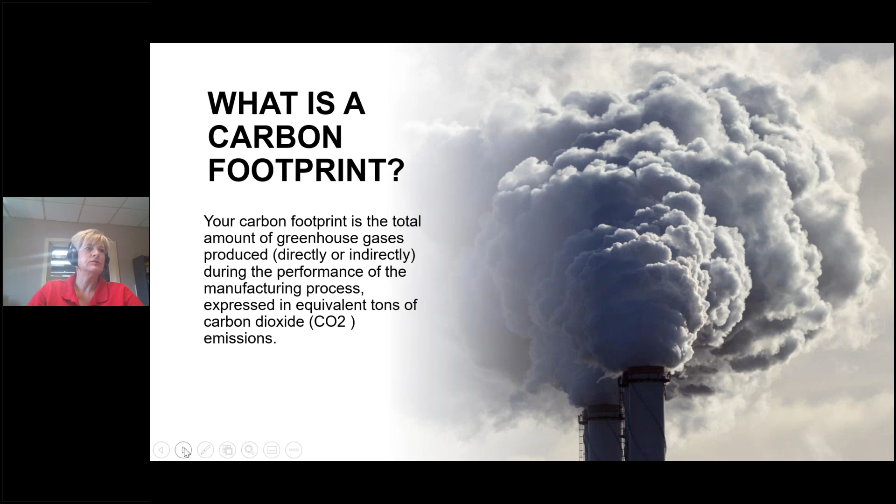The thing that I find people don't get—it's not very well handled in the media, and it's a very confusing concept—but in reality it's fairly straightforward: scope 1, scope 2, and scope 3. Scope 1 is yourself—all the CO2 you generate in your company, directly through your equipment and what you do for a living. Scope 2 is your fuel, all your indirect purchases—basically the electricity and natural gas that you purchase. And scope 3 is basically everything else.

So all your vendors, all the end of life for your products, flying on planes, driving to work—all those things are your scope 3. Mostly what we're going to talk about today is scope 1 and a little bit of scope 2, because scope 3 is so far beyond what I can even mentally get my arms around. We just got to start with scope 1 and scope 2—start at the beginning. So a little bit of background.

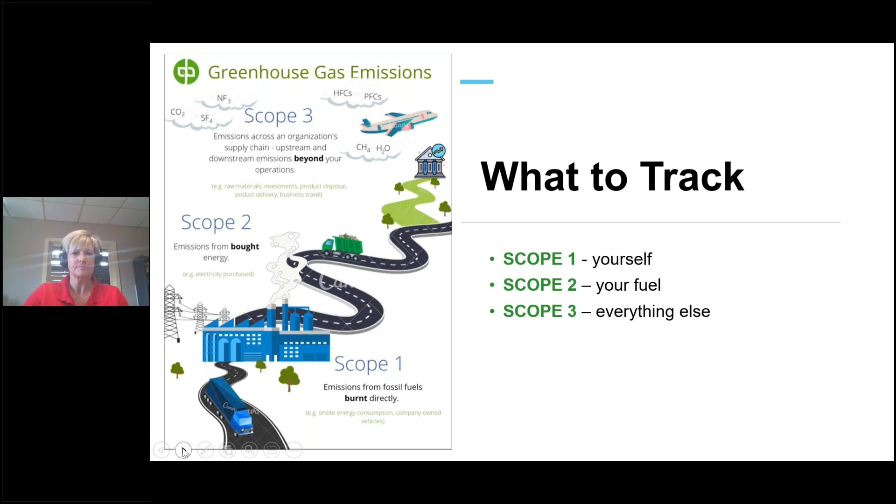There's a lot of little facts that I thought were really interesting, from a lot of different sources, but this is pulled all from either government sites or other large carbon reduction sites. I tried, if it was something specific to the industry or something that was really shocking, to cite where it came from, but most everything else came from published sources.

So if we look at the entire market of electricity that is generated from fossil fuels right now, it's a little over 60%, 20% renewables, and 16% nuclear. That's something we've heard a lot. And one of the things they talk about is, how do we electrify when you're still getting it from coal? What are we really accomplishing? I can't solve that problem today, but I can give you some strategies.

If we look at the greenhouse gas from electricity—being able to make electricity—it's really some interesting numbers, that right now there's more carbon being produced through electricity generation than there is actually in fossil fuel burning. But that's kind of the whole point of why they're trying to convert to renewables. And another great statistic: 77 quadrillion BTUs are consumed in the US.

So I had to Google it because I didn't know it off the top of my head—a quadrillion is a million billion. So 77 million billion BTUs is what we consume in the US. That is a lot of power.

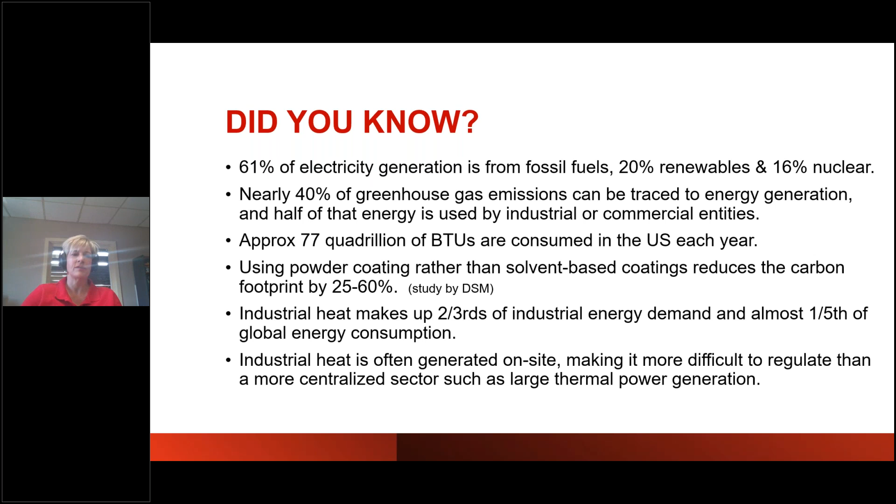You can't really transport heat energy. You have to make it. You have to have a burner. You have to have something that generates the BTUs. So just in case anybody doesn't understand what a BTU is, it is that energy. It is the energy it takes to raise a pound of water 1 degree. And that's the scientific, but that is the energy that we're all talking about here. I'm going to try and stay in BTUs, even though we may be talking about KWs, just to keep the nomenclature straightforward.

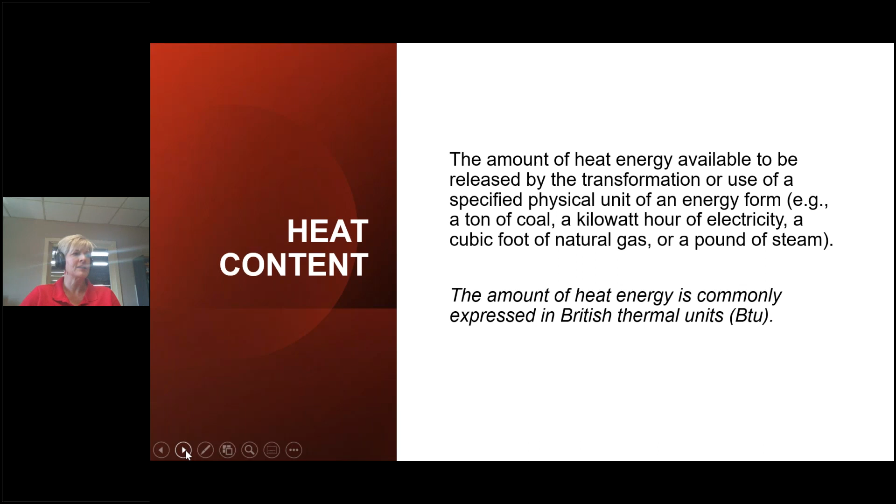So when we burn a fossil fuel, basically we're taking the CH4, and that's typically what we do in our industry. And if we sit there at the bottom here and look at the pounds of CO2 per million BTUs, you can start to see why natural gas has almost half of the CO2 of coal.

Now in reality, if we looked at electricity right now, this is you burning those to generate electricity, as a point of reference it's almost 250. So it's really interesting how you don't see that in the media very often, that electricity right now produces a whole lot more CO2 than us burning natural gas in our plants.

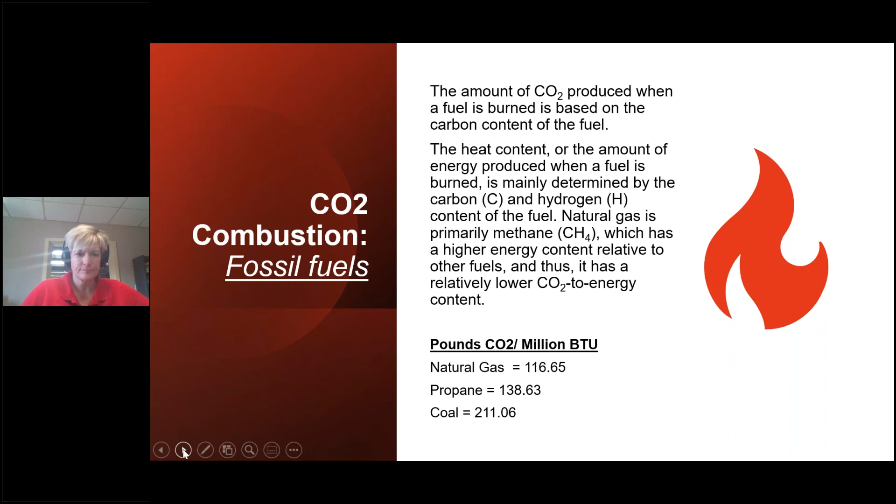So the electrification movement, you may have heard about this. There was actually just a conference a couple months ago all about this. And these are the kind of tactics. We're not going to talk about these. These are things you can easily Google and see what is available out there of how people are trying to deal with the CO2 that we're generating.

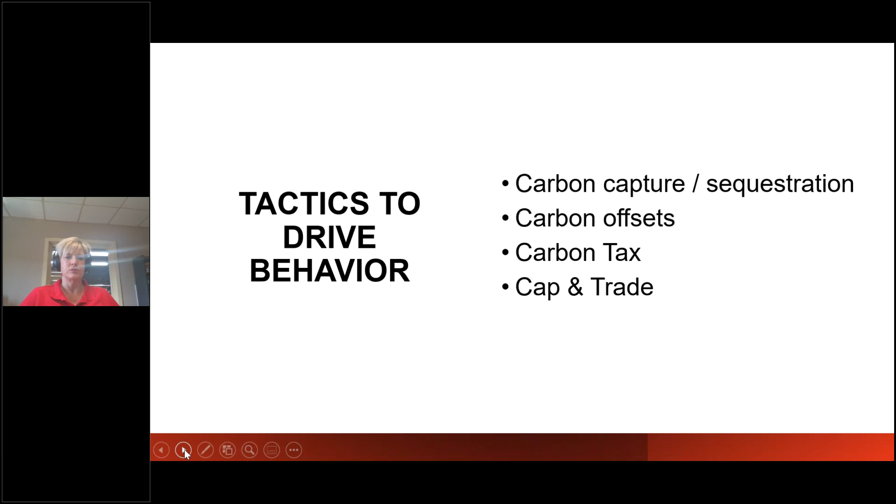Because most of the true informed electricity producers realize that in heavy industry, we can't get rid of natural gas. It'll never happen. But can we manage the natural gas? Can we manage the CO2 a little bit more effectively? And these are those tactics. If you have not heard about hydrogen as a new energy source, you should do some Googling. There is a lot of research being done in adding hydrogen to the natural gas stream in industry. Basically having the burners consume some hydrogen. There's research being done on all forms, and significant research.

There are some issues with hydrogen. It is, as if you remember the Hindenburg, it's really flammable, but it does have some real positives. But there is a lot of steps between here and there to be able to effectively use hydrogen. But it is probably the most sought after research right now of how to reduce long-term the CO2 implications of natural gas. But there's lots of things that have to be worked out technically to make sure that that's a viable approach.

So I threw this in here just because I thought we don't talk about nuclear very often. And I was surprised to learn it's the most expensive utility. It's probably partly because we don't use very much of it, but we still get almost 20% of our energy there. France is almost exclusively nuclear. And I did not know this fascinating fact, but a bunch of universities in the US have little small reactors that they use for research and other types of power needs.

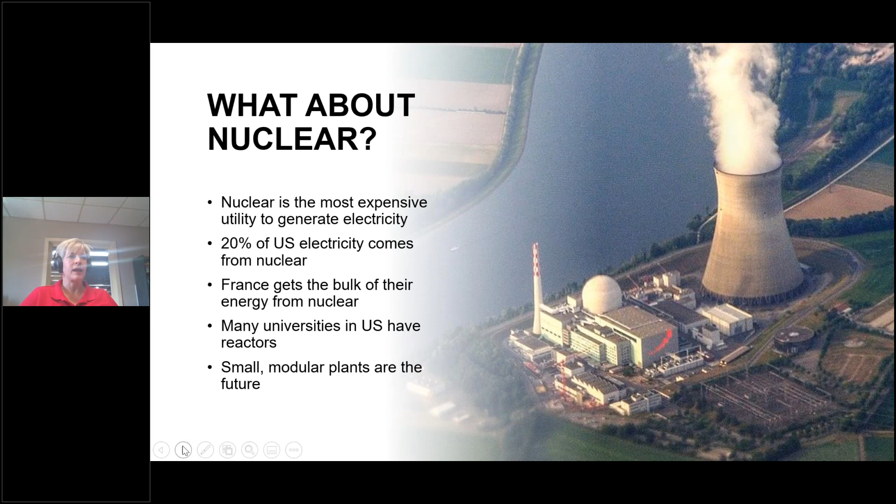And where the industry is going is away from the big, huge natural gas or nuclear plants that we've seen in our lifetime. They're going to these small modular plants, which are much safer, much more well-designed, the risk is significantly less, even with the amount of redundancies. But right now, who knows? There's a lot of political implications there that have to be dealt with.

So if we get straight to manufacturing, these are the things that are really driving it. And you probably hear in the news right today that the new Inflation Reduction Act, there is $370 billion in that just for climate change, just to manage and invest in climate change technologies. There are a lot of executive actions that are being talked about. There is the SEC, Securities Exchange Commission, talking about a massive rule that, if this goes into place, will be dramatic, in my opinion, in that it will require all public companies to report their scope 1, 2, and 3 emission results, which means they will have to do so much research and investigation, and asking their vendors, asking us, what's your carbon footprint? What's your carbon footprint?

What's your carbon footprint? We will have to supply that data because we will be their Scope 3. This is something we need to pay attention to because a lot of our customers are Fortune 500 companies. Anybody who's public will have this issue.

A statistic I saw when they're talking about it—you've heard there's consultants galore popping up everywhere trying to help people and make money off of this. But $5 trillion in the next 3 years being invested annually, that's $15 trillion being invested in this space.

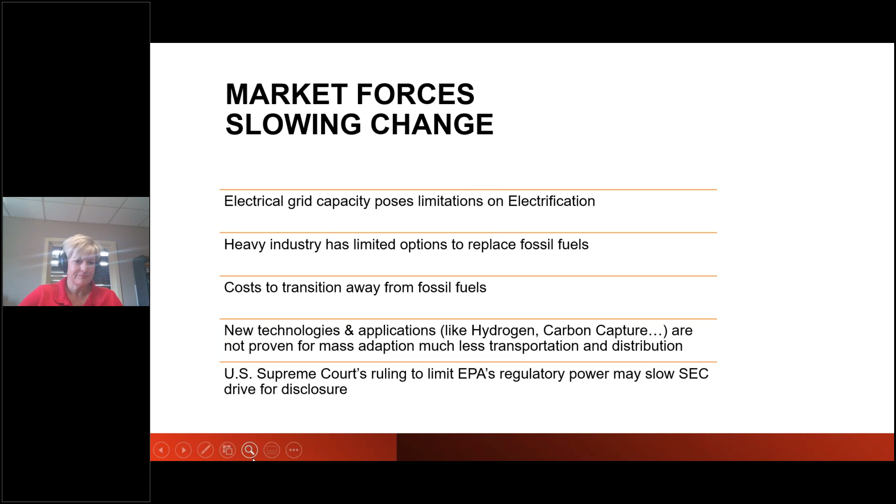As a little statistic, 90% of S&P 500 companies have a report on sustainability. And if you look at the timeframe, it's up from 20%. That is a massive increase.

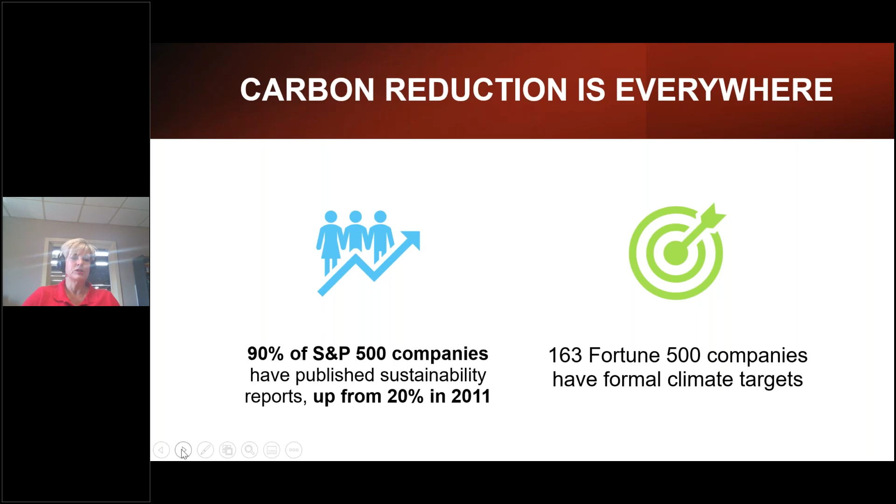And several of them have announced formal targets—they will be carbon neutral, they will be net neutral. However they claim their targets, they are publishing them, and companies that are in our industry. So I put this in here.

So let's get to the meat of this, and let's get to the powder coating piece. In reality, to reduce carbon footprint in powder coating, these are your choices. This is all there is.

What are you using for powder? What are you using for your washer chemistry? What kind of equipment do you have? How are you running that equipment? How are you handling the waste energy, the waste heat, waste water? All those kinds of things consume energy. And then how well maintained is your equipment, your whole process? If you're not doing maintenance, you have an inefficiency.

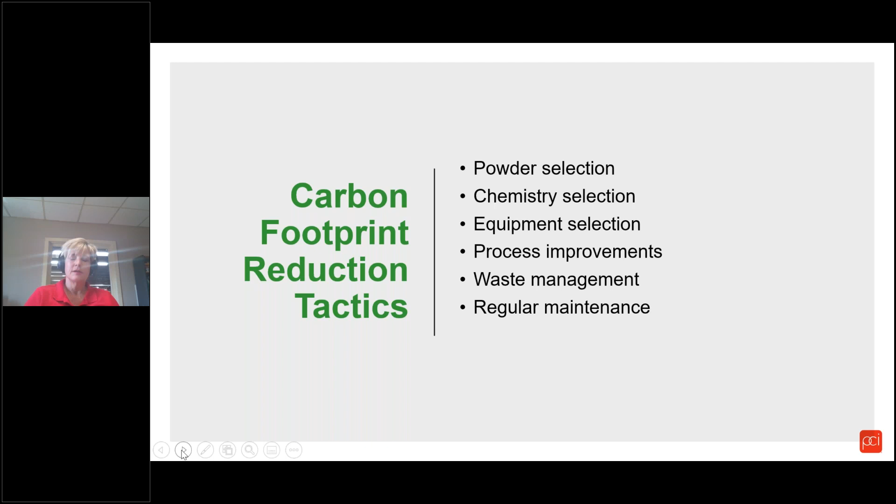Because the only way people are going to make any substantive improvement is to use less gas, use less energy, and be more efficient.

So when we look specifically at the powder industry, I have not yet found a powder manufacturer who does not have a green target. I'm sure they may be out there, but I haven't found one yet. We're starting to see a lot more energy around low temp powders, which decreases the temps in the oven, which is a direct gas savings, which is a direct CO2 reduction.

There's more discussion about whether you can reduce the amount of mil build, the amount of powder you have to use to coat the part. Again, that directly relates to how your process runs. So, are you throwing away the powder? Are you reclaiming the powder? All those things factor into how much CO2 you are generating.

And let's be honest, there's more formulation changes to come. A lot of the resin companies are working very, very hard at this to find more ways to drive down the temp or increase the performance of the powder, particularly to the point of carbon reduction.

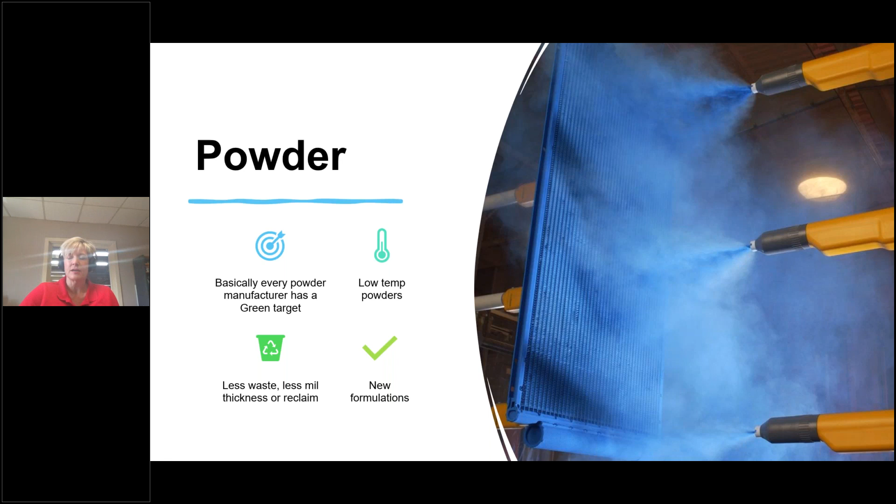So now let's talk about the washers.

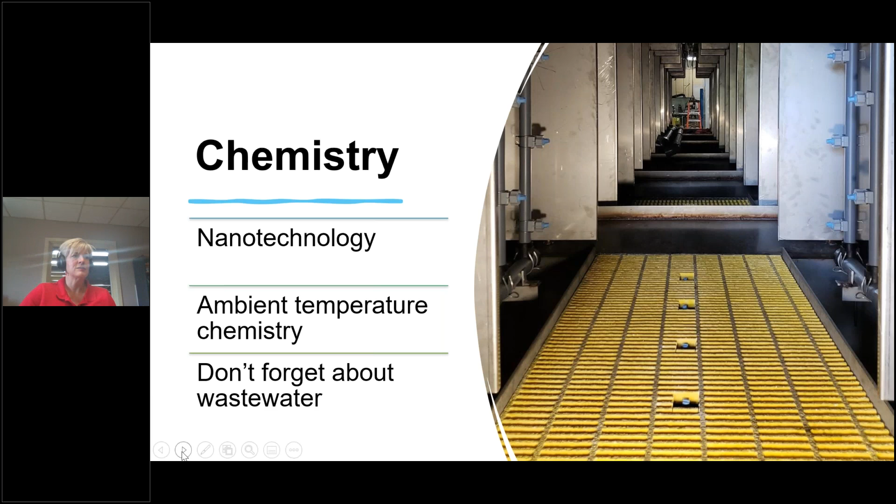Nanotechnology, zirconium type technologies, that's a type of nanotechnology. Those don't need heat, and if you don't need heat, you don't need natural gas. There's ambient temperature chemistries out there. You've got your wastewater, and the idea of having 2 or 3 heated tanks anymore, you're seeing less and less of that. You could also look at electric heat versus natural gas. That's not the most inexpensive way to heat your water, but it is a possibility.

The burner efficiency - we always know maintenance is important, but it's always an afterthought. This is one more way you can get it pushed through your company: if your burner is not properly tuned, you are wasting gas. You're paying for that gas you're wasting, and that gas is creating more CO2. So there's a direct connection there. It deserves to at least be talked about from a sustainability standpoint, looking beyond just carbon footprint and at the whole process of environmentalism.

And the amount of water, because we all know water's an issue. If you're on the west side of the country, water's a real issue, and I don't think that's going to go away unfortunately. So when you think about how much water you throw down the drain every year - 1 gallon a minute going down the drain is 125,000 gallons annually. That's a shocking statistic to me, but we don't think about it when we extrapolate these things out annually. So it's worth considering when you think about your drag out and stuff.

Titration - if you have to dump your chemical, you have to dump your tank because you didn't titrate it right, you got to start over. Again, the maintenance of all your processes directly relates to your costs and your footprint.

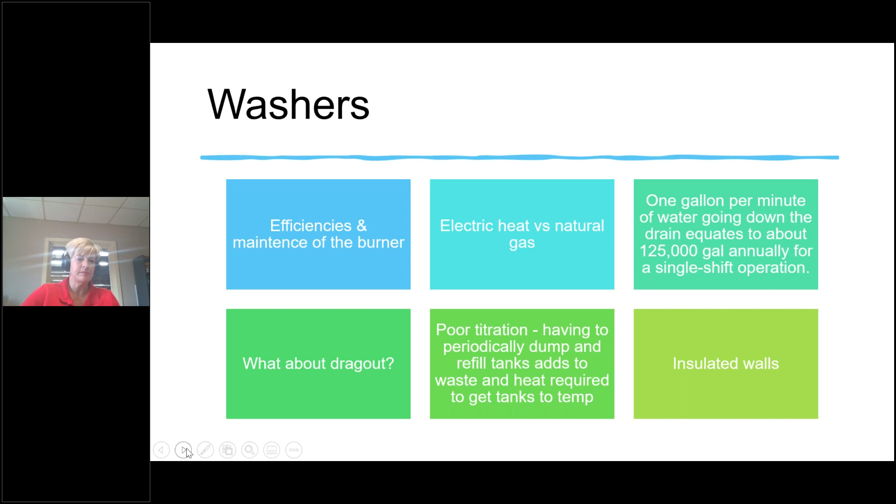But those are the type of things you can do on the washer side. In reality, it's the ovens - that's where all the gas goes. The gas is consumed by the ovens, and that's where the vast majority of your consumption is going to be. So if you're really looking at reducing your carbon footprint as a powder coater, the place you need to look at is your ovens.

With ovens, it's real simple - just use less gas. So how do you do that? Well, one is the obvious: use less temperature. There's a direct correlation - less temperature means you use less gas. But there's a cost to that, because the lower temp you go, typically it's more expensive powder. It's all a trade-off - those are the costs I was talking about earlier that you have to pay attention to.

Another thing to look at is infrared. Infrared is going to be a much more efficient process from a BTU consumption standpoint, but also UV. UV uses zero heat in the actual cure process. Now it needs a thermal process to gel the powder, which is typically infrared as well, but using these different kinds of technologies - they're not as easy to work with as convection is - you can make some dramatic improvements, 50 to 100%, so dramatic.

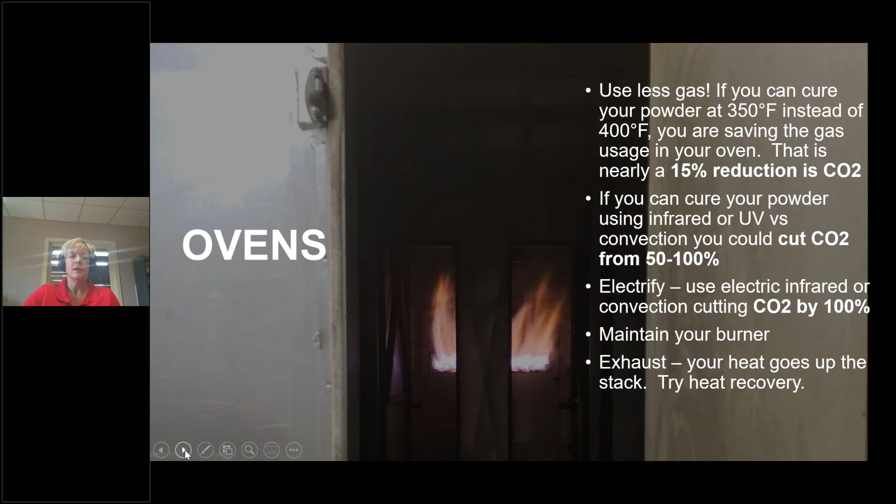But the easiest one you could do tomorrow is just make sure you're maintaining your burner. We can't say it enough - whether you're lean or rich, you're looking to get to efficient use. The other thing to pay attention to is your exhaust. I've gone on roofs before to look at how much energy is going out into the atmosphere, and we're going to talk about that in a second. But the idea is, can you recapture that heat? Can you reuse that heat? Are you even looking at that? Those are some immediate tactics - they are small in the greater scheme of things, but they're still measurable.

So I talk about this particularly because I want to talk about what is combustion. If we're trying to get to efficiencies of a burner, you got to understand what combustion is at the beginning. We're taking the CH4, the natural gas, and the chemical reaction of combustion breaks apart the CH4, and with oxygen ends up making CO2 and water vapor. That is the chemical reaction of combustion.

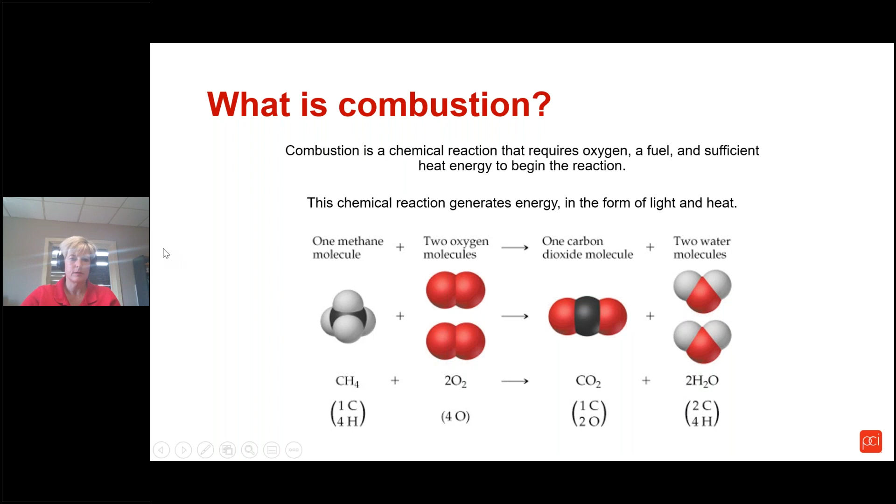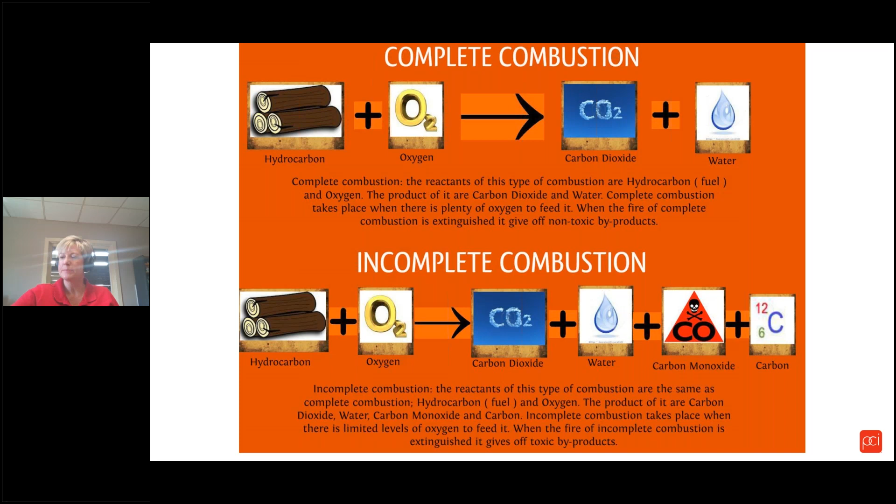What you're always looking for is complete combustion. That means all of the fuel, whatever hydrocarbon you're using, is being converted to CO2 and water. Incomplete combustion, typically because you're running a rich mixture, not enough air, you're going to end up with CO. If you don't think about it for a second, you think, oh, shouldn't we just run it with more air, then we'd make less CO2 that way? Technically, yes, but you'd use more gas, so you haven't really accomplished anything. You want the efficiencies of how the equipment is designed to be at optimal performance. So you want that complete combustion.

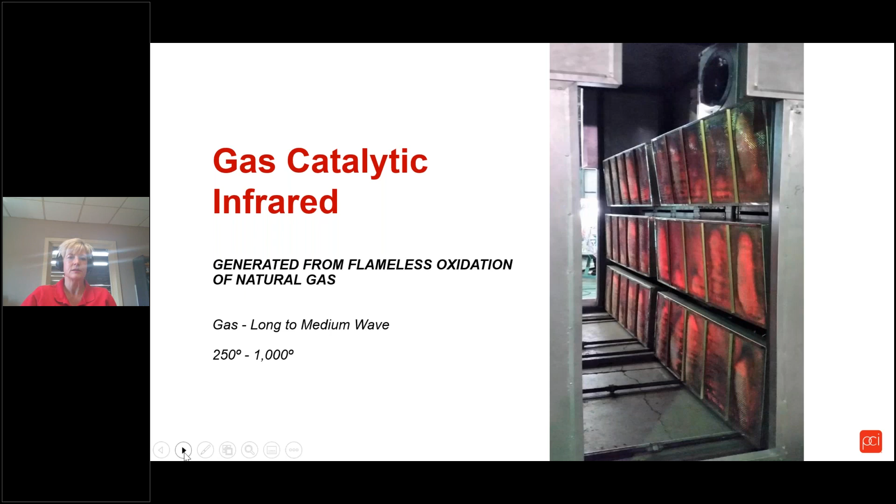So let's just talk real quick. If we're looking at the kinds of infrared, we've got gas catalytic, which is basically up to 1,000 degrees. That is a flameless combustion of natural gas. You've got electric infrared, it's coming off the electrical grid, but that's a very, very fast technology. They all have strengths and weaknesses.

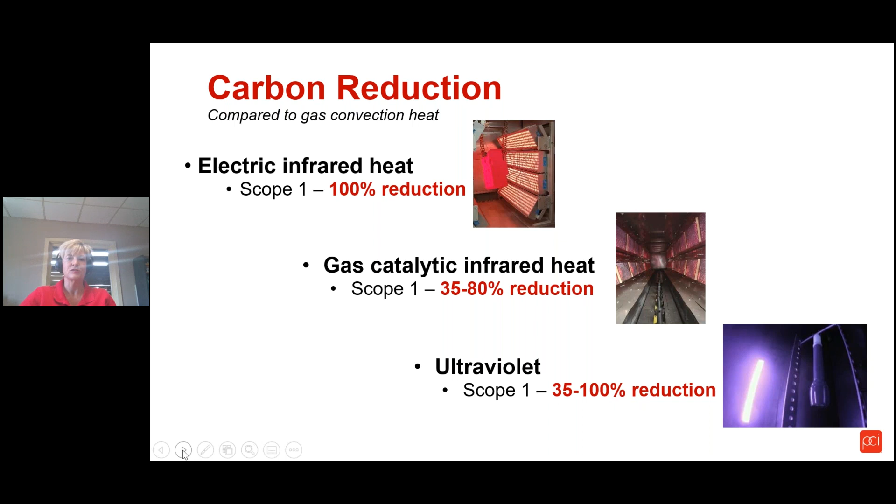If we look at the carbon reduction as a whole, you've got electric, obviously, is 100% scope 1. Now, obviously, there is a scope 2 implication here because electricity has its own issues. Catalytic, using natural gas, our studies show it's about 35 to 80% possible reduction. We don't say it's a direct reduction, we say it's possible. And ultraviolet, again, is 35 to 100. The 100 assumes you're using electric infrared on the front. Again, these are all scope 1s. So it's what you're doing in your plant.

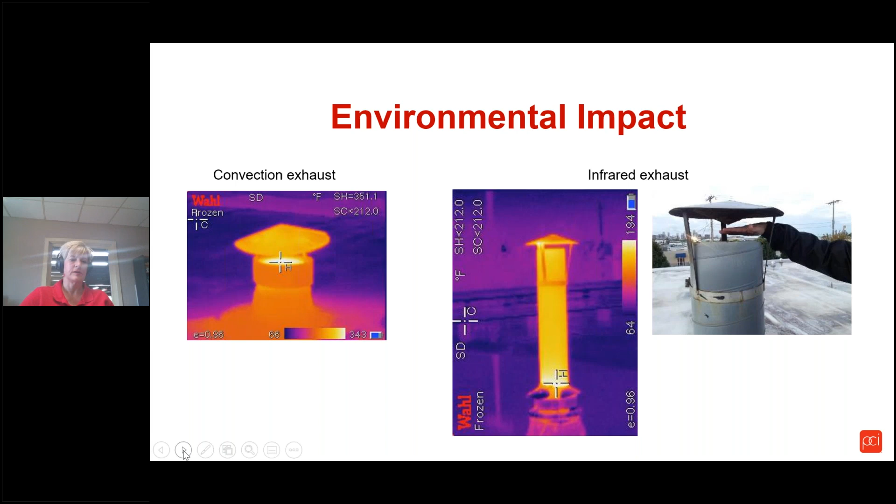The next two is a thermal image of a catalytic, and then a picture of the catalytic, and it's a gentle warm breeze. You can see someone's hand sitting on top of it. So you're not putting out as much energy, as much exhaust into the atmosphere. That's just fundamental to how different kinds of ovens are designed. Just something to be aware of.

So what I did is I took our ovens, in our technical center here, and started running some tests. I'm always trying, because we do both gas catalytic and electric and convection, so I'm always trying to find parts where I can do some side-by-side comparisons, so I can really see how they perform differently. I have 2 case studies to show you real quick.

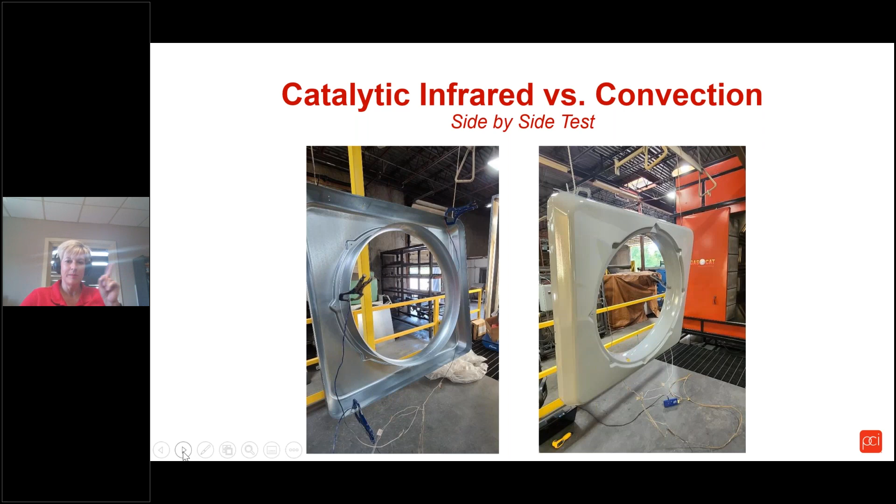This one is a light gauge formed part. I have yet to do these same parts in electric. Unfortunately, I just couldn't get to it with everything else we have going on before this speech, but that will be coming. The assumptions I basically use, these are batch ovens, again, our ovens here in our plant.

Different ovens in operation are going to modulate, and there's different expectations of how catalytic, electric, or convection will modulate in use. In theory, if you had a batch convection oven and you turned it on, got to temp, and never opened the doors, it really wouldn't use that much gas. But you wouldn't be doing any work and you'd never open the doors, so that doesn't really help you. So flow-through results are very, very difficult to do.

And I have a misspelling there, I apologize. The only way we can do that is we actually had side-by-side lines in the real world running the same parts, and I just don't know anywhere where that exists, where I can test. So what we did was we took a heat up temperature, because that would have no modulation. I don't want to imply that this is practical in use. We are working on some designs and tracking mechanisms to be able to take this to real world production use studies, but that takes time to do. So this is something we did in the lab, again no modulation, 100% on all ovens.

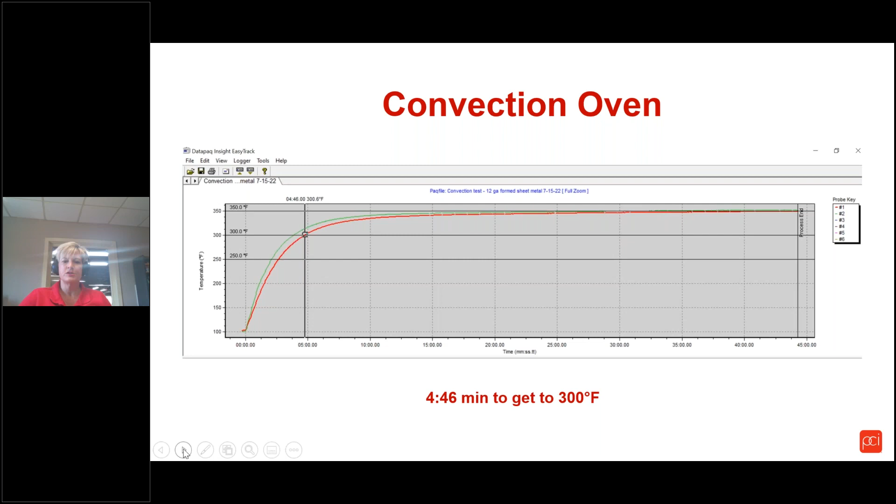So this, particularly in convection, is driven off of load. The amount of parts you have in there affects how fast something can heat up. Infrared doesn't care about load. So you're not comparing apples to apples.

But if we said the target temp was 300 degrees and the time to temp was 114 seconds on the catalytic and 290 on the convection, then we just calculated the BTUs used per second, and that calculation is based upon the standard that there's 117 pounds of CO2 per million BTUs, and then it's just a formula, and it came out with the CO2 generated, the pounds of CO2.

So that is, the catalytic would have, in the heat up, the reduction would be 82%. I was amazed it was that high.

Now, in real world application, I can't say whether or not that would hold, because there are just so many factors that are going to factor into it that cannot easily be normalized. So probably the best we're ever going to be able to do is do it based on a calculation. This is based on hard data. We would have to theorize in a real world.

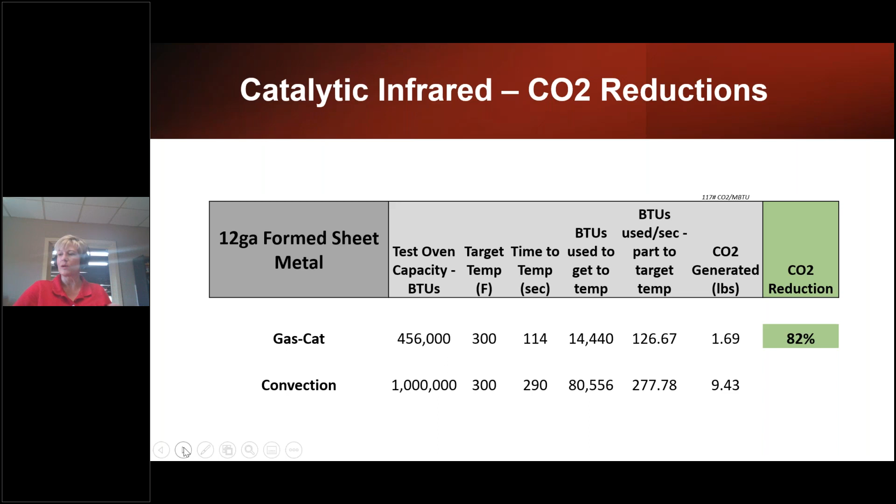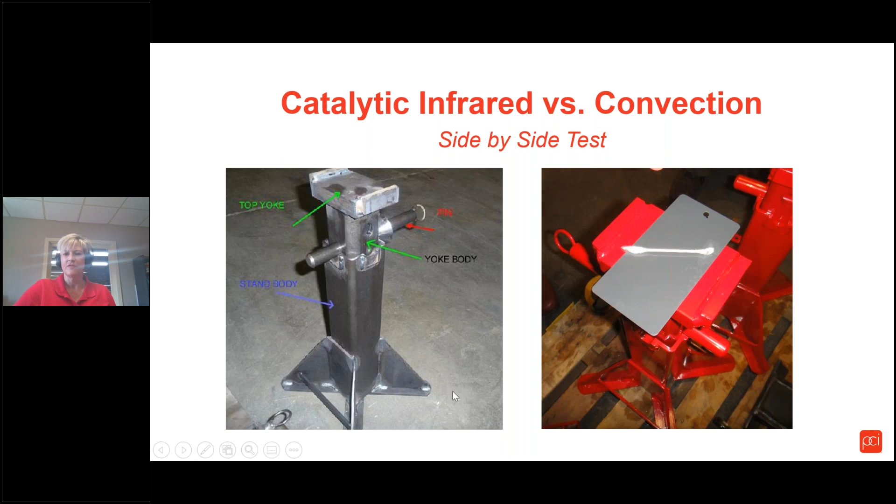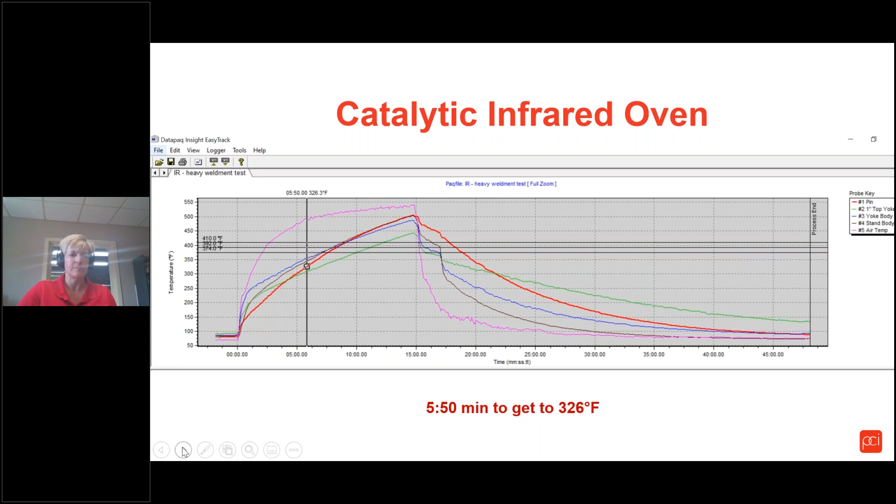And then it's 26 minutes to get the same part up to the same temperature. And here's the calculation on that.

This one was done several years ago, and we had a smaller burner on that oven, so it was only a 400,000 BTU burner. Obviously, if you have a bigger burner, you're going to use more BTUs, but you're going to get there faster. So theoretically, the formula should come out the same, but I don't have facts to back that up.

So this was a different test oven on both ovens. And again, the target was 326, and you calculate it out, and you get to a 67%.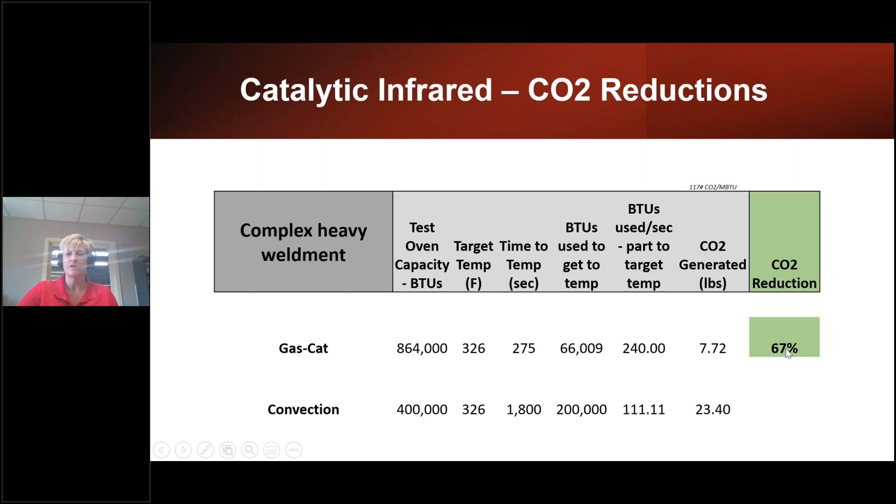So some things to consider. There are lots of conclusions that we can make through all of this. There is basically no easy or inexpensive way to reduce your CO2. All of this will require money. It will take people. It will take time. It will take resources. It will take equipment.

So if you were to look at how to do it, your choices are: you're either going to have to change out your equipment, change out the parts with some kind of substrate change, change out the fuel to power your equipment, change your chemistries or your powders, or change the way you run your business. So all of these directly relate to cost, and there's no way around that.

But that's the world we're living in, and that's where our customers are taking us. I am getting more and more inquiries on the benefits of infrared from a carbon footprint standpoint than I've ever had before. Last year, for the very first time, I had somebody buy based on that. That was their primary driver. That has never happened. It had always been, oh, that's nice, but what's your price?

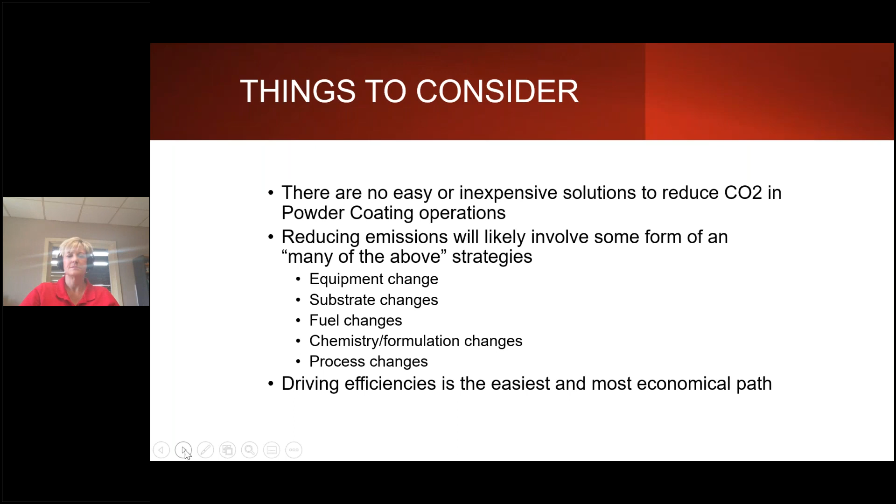Other than some scope 3, which would be if you were buying the powder, that would be your scope 3. Your scope 1 again is your equipment. Scope 2 again is your energy that you're purchasing. The only way you're going to make a substantive difference is to buy less gas or buy less electricity. So those are the kind of things that we tell people to think about.

So as a recommendation, if you start with your scope 1, the first thing you have to do is know where you are. You have to know what your current state is. So somehow you have to assess, monitor, measure your current equipment, and look at your processes. You have to get a number, because if you're going to set a new target, how will you know you've gotten there if you're not measuring?

And then obviously it takes you down the road of where can you make changes, can you upgrade or change equipment? But if you do make any investment, that is something you should be promoting. You've got to measure it. You might as well promote it.

But if you start at scope 1, that will more directly drive your scope 2. Scope 3 gets very messy very quickly, especially from a measurement standpoint. And I cannot realistically expect any small business to reasonably be able to affect scope 3.

As an interesting factoid, 75% of manufacturers have less than 25 employees. So when they look at the cost of this and the infrastructure it's going to take, most small manufacturers don't have the resources to do this. I'm not really sure what the implication of that's going to be, but that's the reality of the world we're living in.